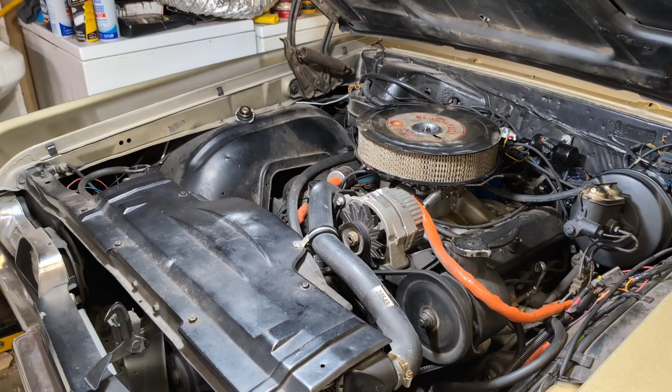So, got to take all the accessories and crap off. Let's get started.

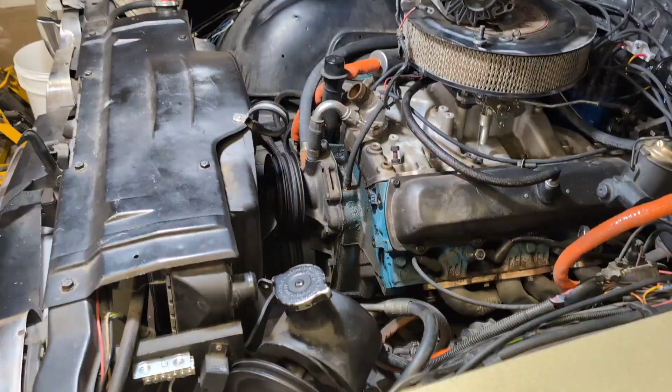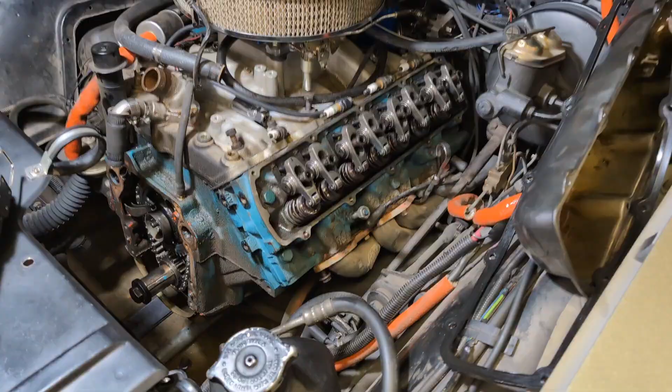All right, I got everything apart. Now let's get the degree wheel on here, and I'm going to see if I can find the absolute top dead center on this thing. I got a piston stop too.

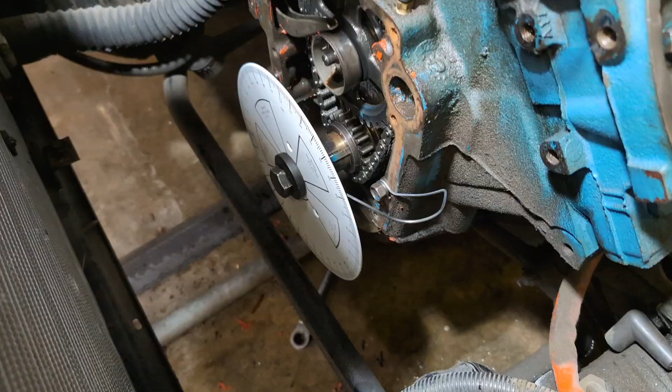All right, the degree wheel is bolted on. I just got it kind of, oops, sorry, something fell. I got it kind of lightly tightened on there. And I got a wire indicator, that is just a piece of coat hanger. I just bolted this down, tightened it. And I've got it, it's going to be hard to tell on the camera, but I've got it to where I can see it as straight on as I can.

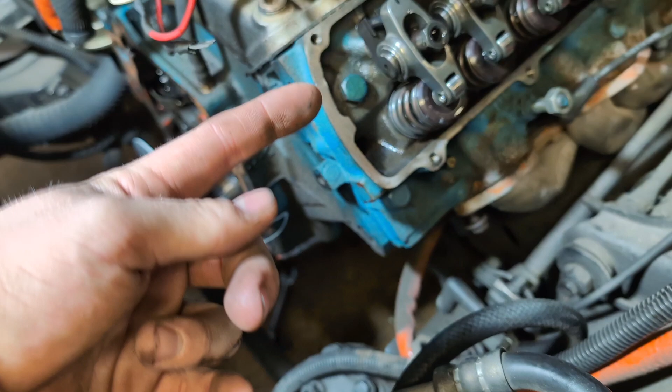And I got the piston stop in. Now what I'm going to do, and I'm going to record myself doing it, I'm going to rotate this around until it touches the piston stop. Then I'm going to write that degree down. Then I'm going to rotate it all the way back around until it touches it again, write that number down. Then I'm going to add those two numbers together, divide it by 2, and that's what I need to set my pointer to. So let's get started.

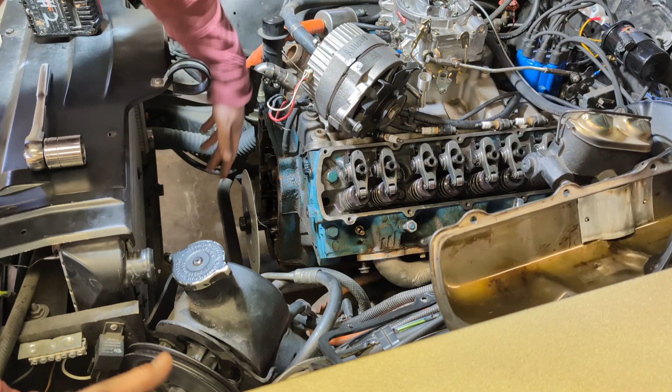Okay, what I've done, and I apologize, it's hard to get the camera in here, so I'm not going to be able to show you while I'm doing it what I'm doing. But what I've done is I put the stop in here. I got this to approximately top dead center on the compression stroke, both valves closed, basically. And what I've done is I put the piston stop in there, kind of retracted the piston just a little bit, tightened it down. About 18 degrees, approximately.

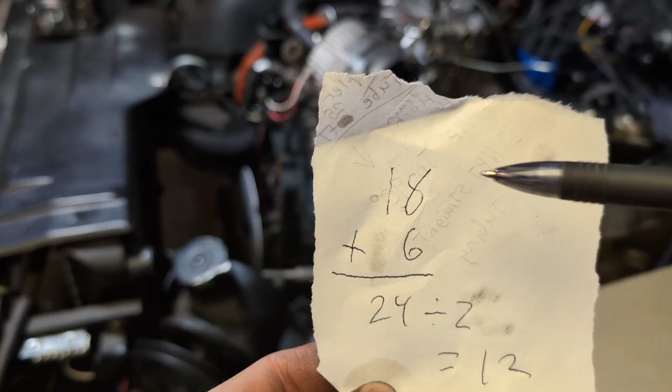What is that? That is, what, 6 degrees? 18 degrees one direction, 6 degrees the other. So we got 24 total degrees divided by 2, we're at 12 degrees. So I pointed that marker at 12 degrees. Let me show you a little closer up.

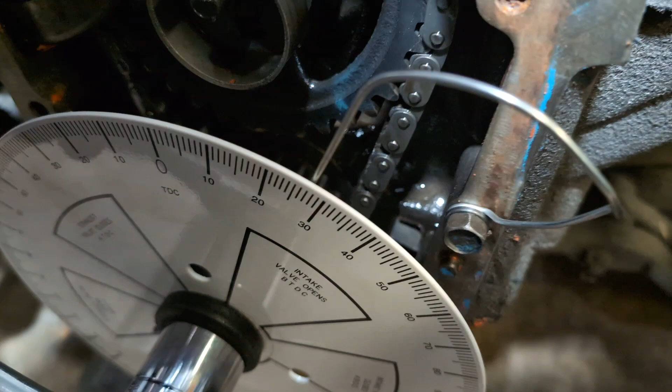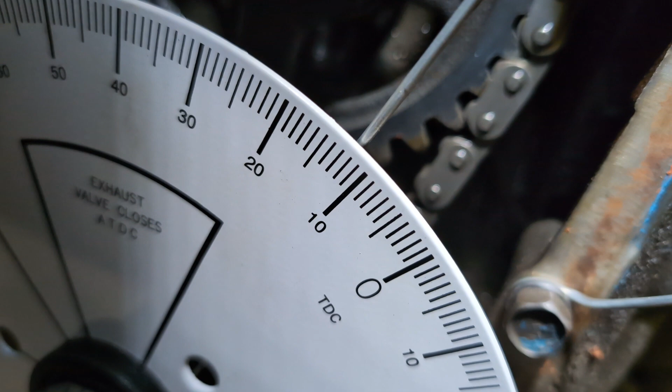Right there, we're pointed dead on 12 degrees. Now, all that we're going to do, let me get this on here, is we're going to rotate it around like so, just going to get it all the way around. Yes, I know it's a small degree wheel, I get it, it's just what I've got, okay? We're going to touch, and what are we at? 12 degrees, dead smack on. So, when I remove the piston stop, these will be at top dead center when I put that marker on 0.

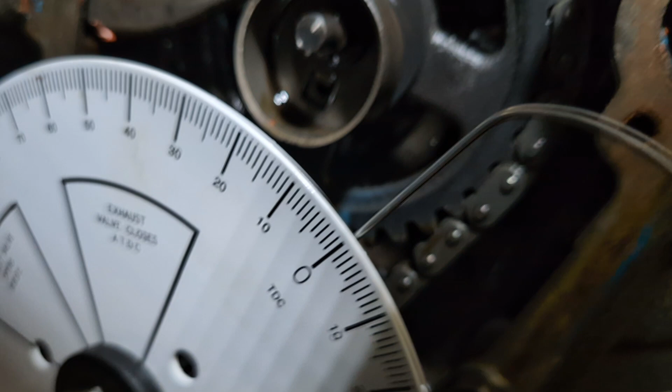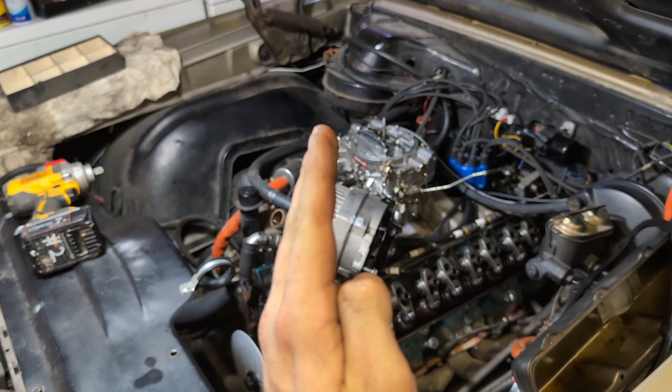Let's give it a test. Let me show you up close. There we go, we're dead smack on 0 degrees. So, this is top dead center. Basically what you're doing is, the piston will come up, and it'll stay there for a few degrees of rotation, and then it'll begin going back down. So all we're doing is finding when it goes up, it hits the stop, then you go the other way, it hits the stop, and you find the middle of those 2 points, and that's your absolute top dead center.

So now, what we need to do, and what I'm going to do, is take this rocker arm off, and I'm going to put a dial indicator on the push rod, and I am going to use that to determine my intake center line. So let's get started.

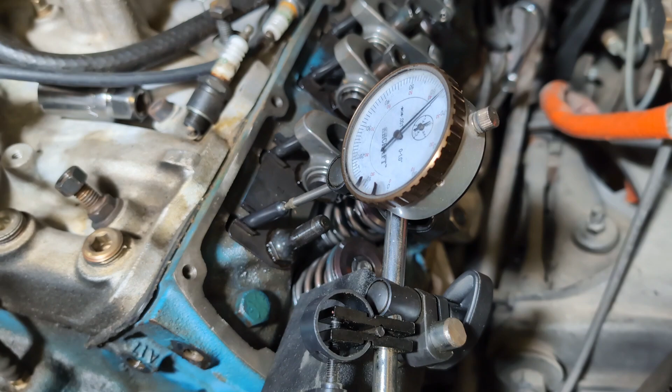The way you determine intake center line is very similar to the way you find true top dead center. All you do is rotate the crankshaft until you get maximum lift on your intake valve. Rotate this until the dial indicator stops moving, then it'll begin to go down. You gotta back up past that point, then rotate it clockwise to that point again.

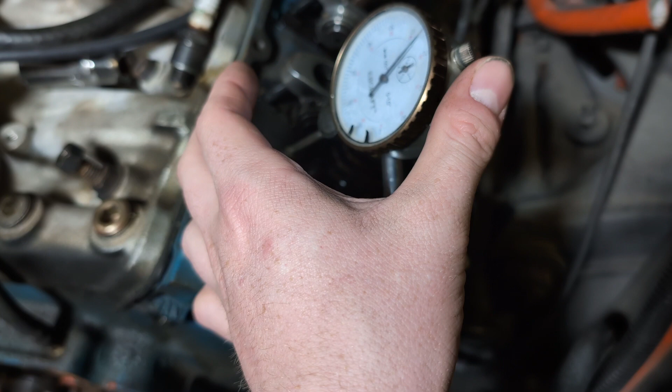Now, instead of doing it at 50 thousandths, you go to the peak, then drop it 50 typically from there, clockwise and counterclockwise, and that's how you check it. We're doing 100 because I called Howard's Cam and they said they want it done at 100 thousandths. So that's where we'll check it. Let's get started.

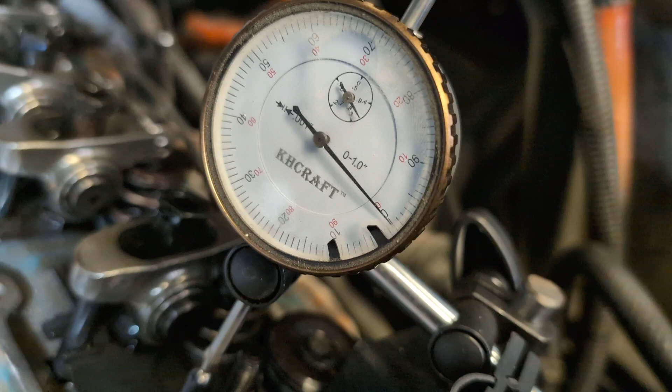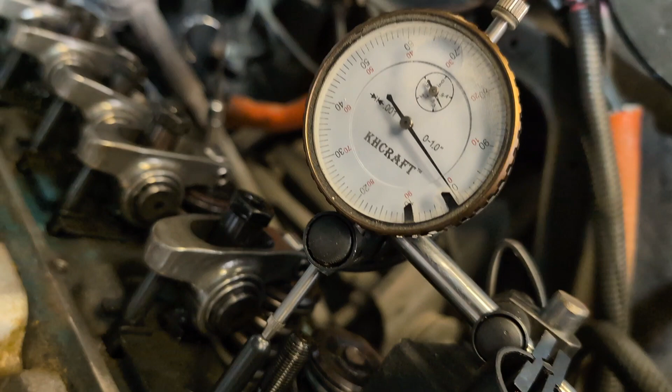All right, we're gonna hook the ratchet up and rotate this. As you can see, the exhaust valve is starting to close. Now we're opening. I'm not concerned with the numbers, just that it quits increasing. And there it is. That is our approximate peak right there.

Now let me zero this out. Let me check this again, because I want to be double extra sure it doesn't go past that point. Sorry for the camera work, it's kind of hard to do this. Yep, that is our absolute peak, where I set the zero point to.

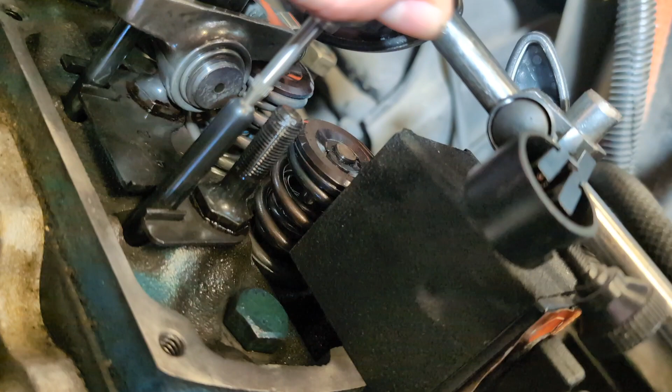That is our maximum lift point for this intake valve, right there. That is our maximum lift. So we're gonna zero this sucker out, make sure it's dead on zero.

Now, what we're gonna do is rotate it. I'm gonna first do it counterclockwise because that's harder. We want that dial indicator to move 100 thousandths. We're gonna go a little past it, then go back to account for all the slack. So let's go back.

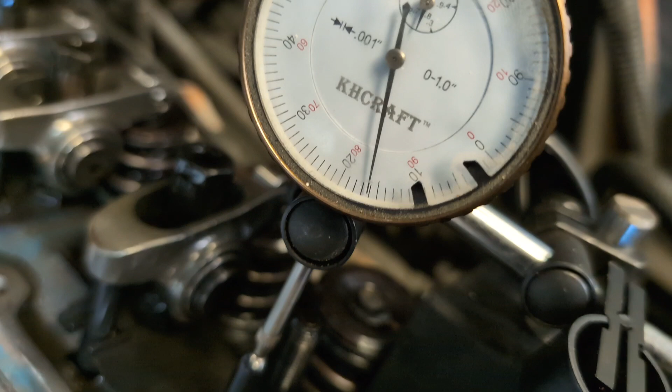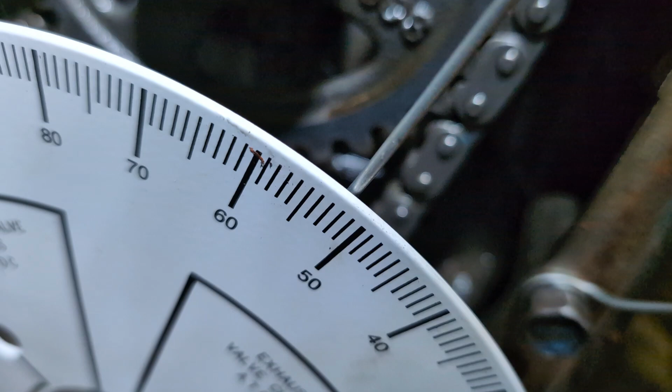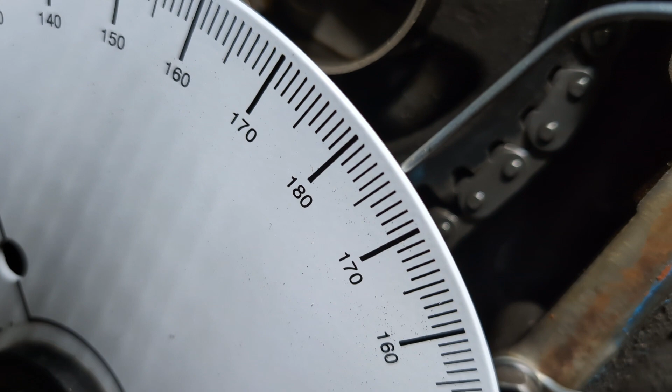So we're gonna go to like right around there, 120 or something. Okay, now we are 100 thousandths counterclockwise on this intake valve on the push rod, and we are at 52 degrees. Okay, we're at 100 thousandths clockwise, and that is 175 degrees.

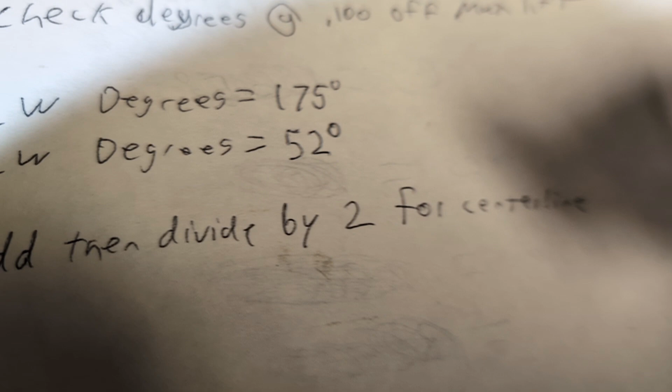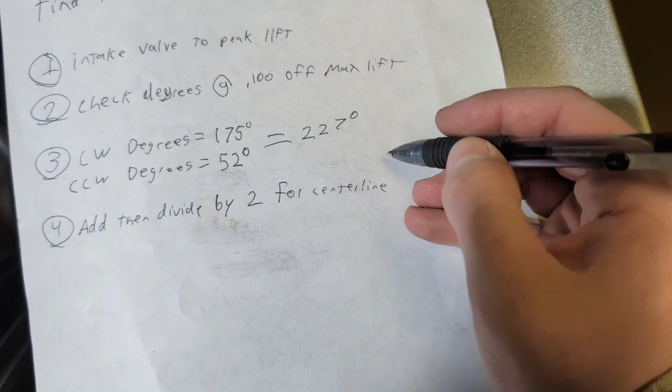Now luckily that's a pretty simple addition. So we're at 227 total, right? 227 degrees. Now we're going to divide that by 2. We are at 113.5 degrees intake center line.

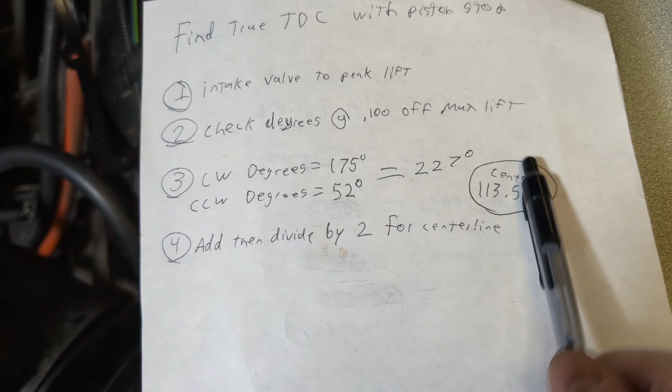So this means we are 10 degrees off center line because the spec for this camshaft is 103 degrees. I bought a new roller set, I just put it on here. I put it on at advanced 8, which is actually 4 degrees of advanced cam timing. And I am currently at 105.5 degrees, so I'm only 2.5 degrees off what I need to be.

So I counted, and there are quite a few more teeth on the adjustment on this thing. So what I'm thinking I might do is just retard it 1 tooth, or advance it 1 tooth, and then bring this back to like 0 degree on the crankshaft sprocket. That's all I'm thinking of doing because I only have 4 degrees of adjustment on that lower. So let's give it a try.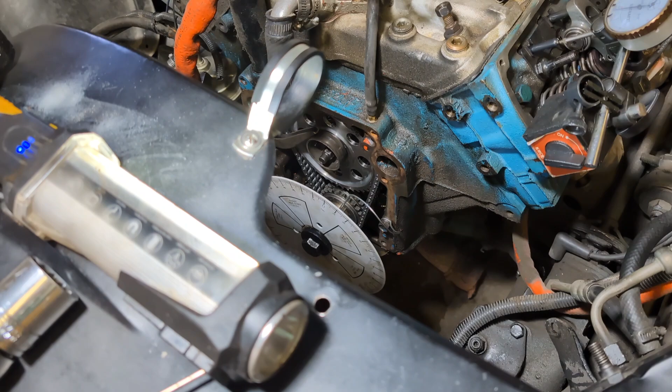What I ended up doing was put the timing marks back dot to dot just as they were. I realized the bottom gear has 24 teeth, so each tooth of adjustment is around 15 degrees or so, supposedly. When I put it dot to dot, I was at about 117 or 16 or 18 degrees, so I moved the cam gear a tooth.

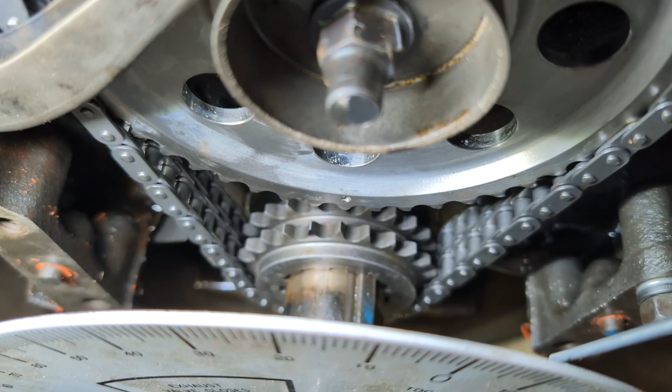Let me put the light on it so you can see what I'm talking about. One tooth off, you see that? That Sharpie mark is R4, and I'm one tooth off, which is actually advancing the cam timing one tooth on the crank sprocket.

So when I did that, I got to about 101.5 or 101.8 degrees, something like that. What I ended up doing, and I'll show you now, is I just went to that R4 position. I was actually at R2, so I went back to R4, and that got me right where I need to be.

So let me show you what I've got now. Let's get it all the way to the top of its travel here. Right there. Now let's go 100 thousandths off. Okay, we're at 100 thousandths off. Let's look down here.

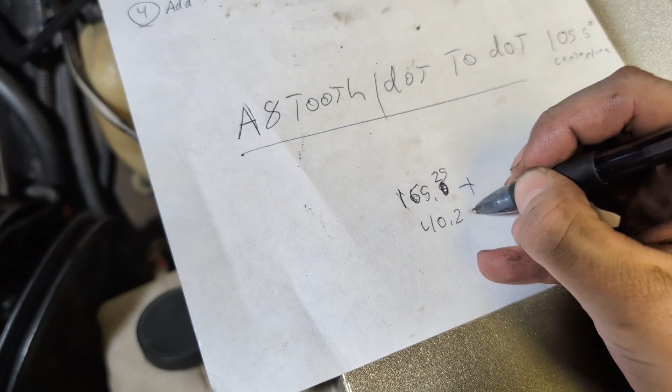165.25. Okay, at 100 thousandths we are at 40.25. Let's write that down. So, 165.25 plus 40.25 is 205.5, divided by 2 is 102.75 degrees centerline. So we're almost 103 degrees.

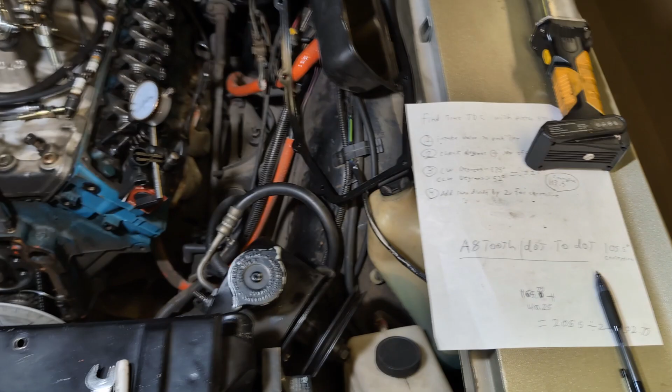The whole point, and the reason I'm telling you this, is if you can't get it just right, you might consider moving your crank sprocket over one tooth and then using the adjustment on your cam gear to compensate. That's what I ended up doing, and it worked out fine for me.

So let's go ahead and I'm going to button this up. I'll just kind of record a time lapse of me doing that.

Another thing I should mention is that when I put the new timing set on, I had to grind some of that fuel pump arm away because it was hitting the rivets on that double roller. So keep that in mind. If you do this, you need to check that. You might have a clearance problem there if you still have a mechanical fuel pump.

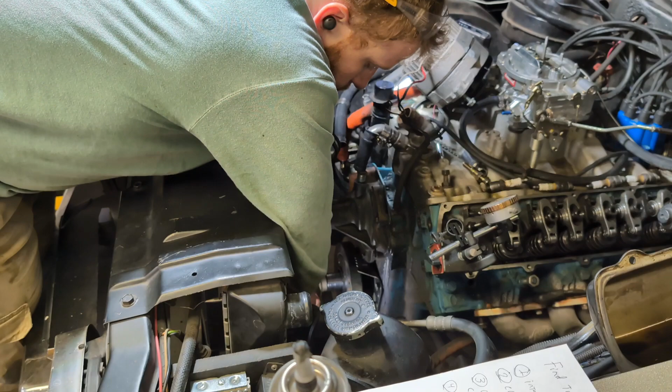There we go, timing set's on. I put oil and fluids back in it. I left the rocker cover off and the bracket that goes over it off so I can set the lash on these if I need to. I'm going to look at them first before I do that. I do have the alternator on and the water pump belt is on. Once I'm done with this, I'll put that bracket on, then tighten up the power steering, and we'll get all that going. But for now, I'm just going to see if the thing will start, and we'll see how it acts.

Okay, it's doing pretty good. Little uneven idle there, so I'm going to put this rocker cover on and then mess with it some more. I think it's good enough to put the rocker cover on at least.